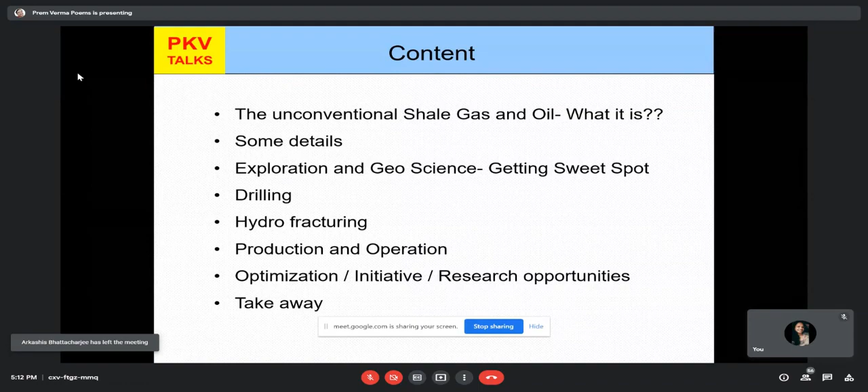Content is, as I told you, what is unconventional shale gas oil. I'll have some details and then some slides on exploration and geosciences, and basically how to get the sweet spot. Then about drilling and hydrofracturing, production operations, and some issues on optimization, initiatives, research opportunities, and what is my takeaway from today's talk.

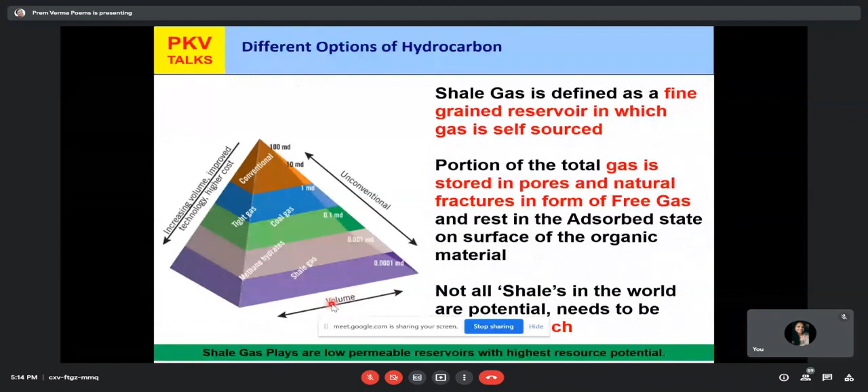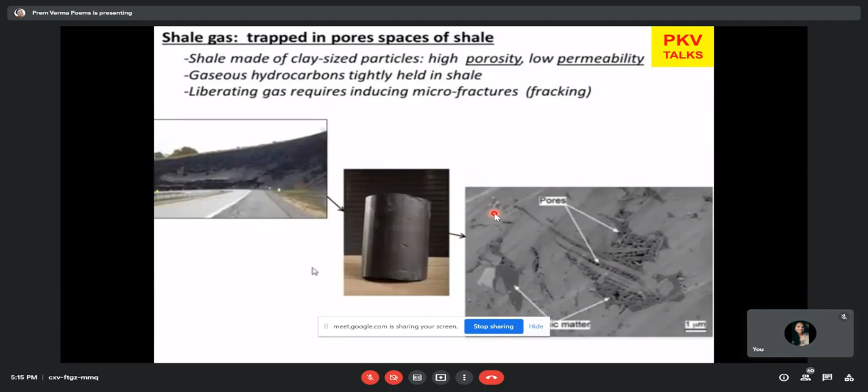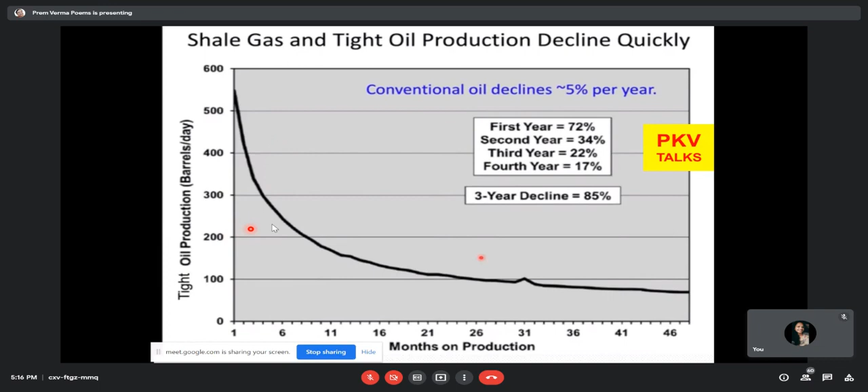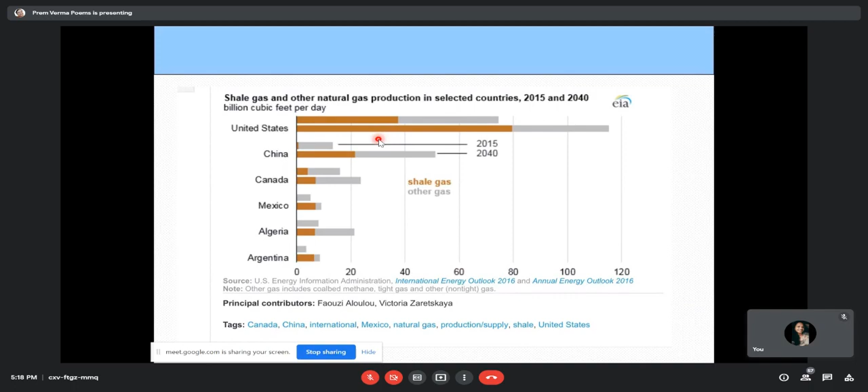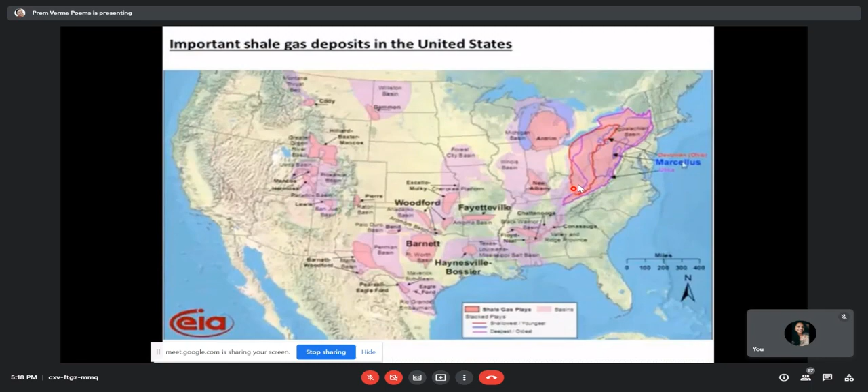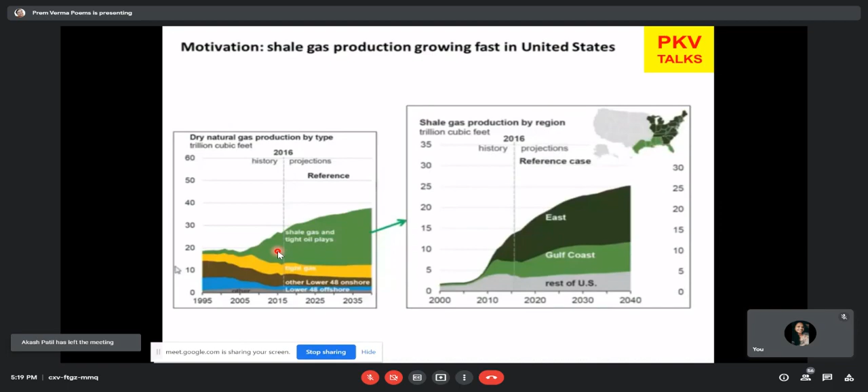Across US it is there, but the maximum shale gas area is in the east. We are somewhere around 30 TCF production, and out of that 50% is shale gas, shown in green color. When you go towards the east, it produces about 10 TCF, and the balance is from others. So the story is that shale can produce a lot of gas, and it is being done in USA and some other countries, and now let's look at where we are.

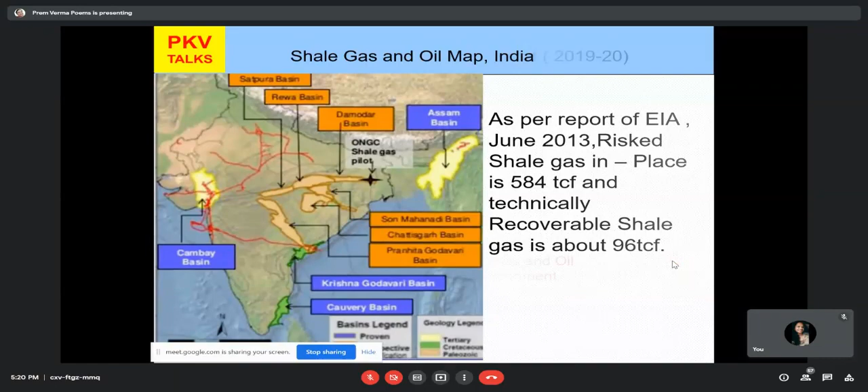But we have to do a lot of work, and unfortunately we are very slow in this, because the policy was announced in 2013. ONGC was given 50 blocks, Oil India Limited 6 blocks. Oil India Limited, till 2019-20, has only 4 shale wells in 2 basins, and ONGC till 2019-20 has only 29 wells in 4 basins. We are still in a very nascent stage. While in USA, in 1 year, they drill something like 25,000 wells, and here we are not even at 100. So we are in a very nascent stage, and something has got to be done.

The reason, as I understand, is these are low producers, and a lot of infrastructure has got to be created, which we are lacking - I'll come to that in my other slides. There are also issues on the policy framework for facilitating shale gas and oil, because this is a costly endeavor and government has to come in a big way. We also have to establish a favorable regulatory and fiscal environment.

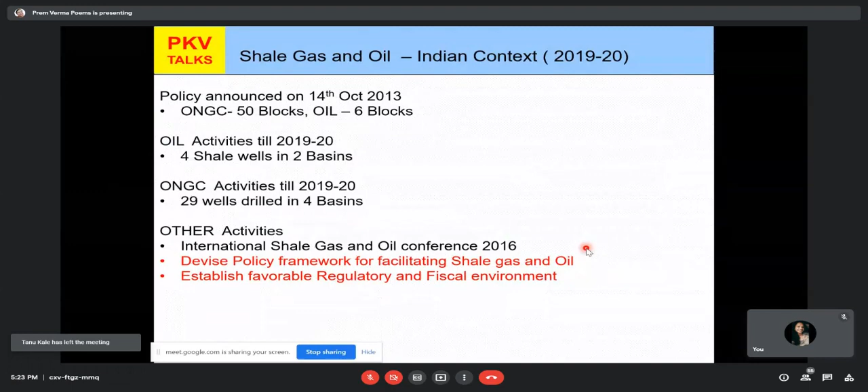Some of the issues include land acquisition, availability of water, even roads. These are some of the issues where government has to come out in a big way to make this happen. We have faced a similar thing in CBM also - they are low gas producers, and companies have to face a lot of issues in starting. Getting the sweet spot in shale gas is a big issue, and a lot of work has got to be done.

In Assam, Digboi was the first oil field in India where we got oil, and they could locate it by seeing the outcrop where the oil was also oozing. A similar condition happened in Ankleshwar, where gas was bubbling through a nearby water pond, and they thought there seemed to be some gas. They did the exploration and got gas.

The story of ONGC begins with the first drilling in Jwalamukhi, in Himachal Pradesh. The area used to be called Jwala Devi, where gas was coming from the subsurface, but in very little quantity. When you pass a lantern or a flame near it, it would just give some flash of gas. The Jwala Devi is still there. We did drilling there, ONGC, but we could not get commercial gas from the area.

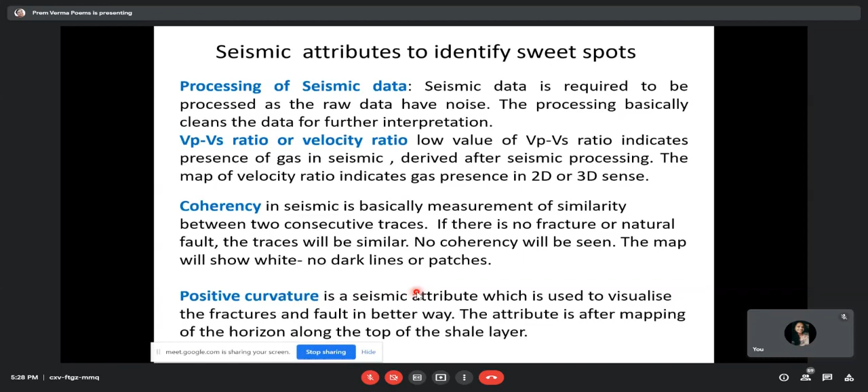Positive curvature is a seismic attribute. It gives us a better picture, better visualization of fractures, and it will help better in targeting the zone for shale gas.

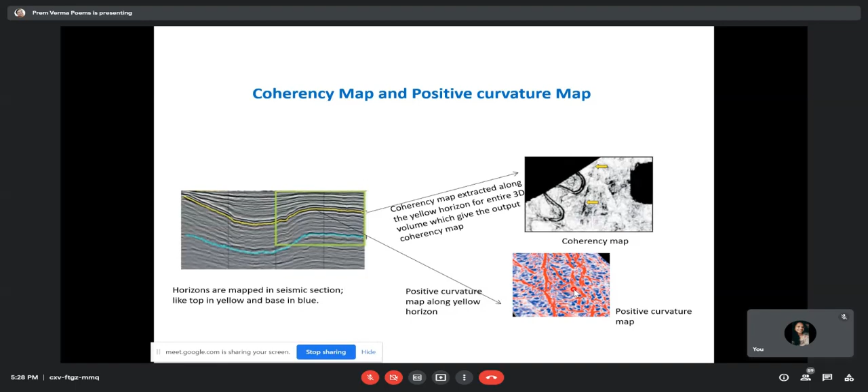You can see here, these are some of the attributes we see on the map, and these are the areas where we can go for shale exploration. This gives a better picture - that is your positive curvature. So just remember, coherency map and positive curvature map help us in getting a better picture for exploration for shale gas and oil.

Lambda rho and mu rho are also characteristics of the rocks. Lambda rho can be derived from sonic and density logs. It measures the incompressibility of the reservoir rock, and its low values show gas presence. Mu rho is the rigidity of the rock, and it differentiates between sand and shale. High mu rho means shale reservoir in this context.

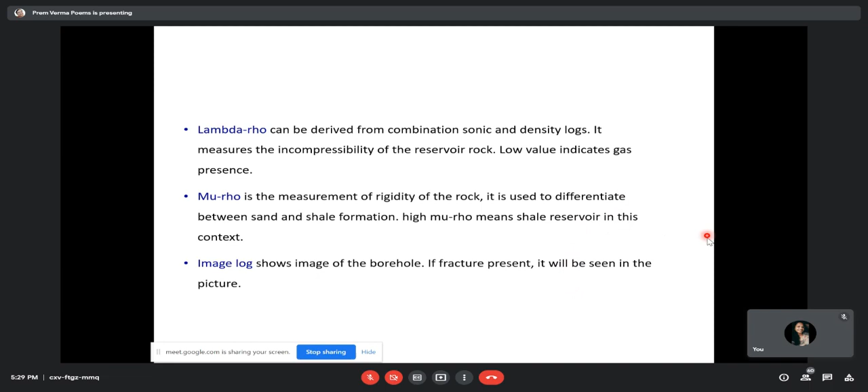An image log shows the image of the wellbore, and these are part of our logging studies. Here again, for the seismic data as I explained, low lambda rho, high mu rho, and low VPVS shows the presence of shale gas.

What we do is use mechanical properties - when we drill and get those rocks, we have Young's modulus and Poisson's ratio, so that we get to know the mineralogical and elastic moduli of the formations. Combined with low lambda rho, high mu rho, and low VPVS, we can estimate the total organic content. That means knowing the thickness and some idea of the porosity, we can calculate the total organic content.

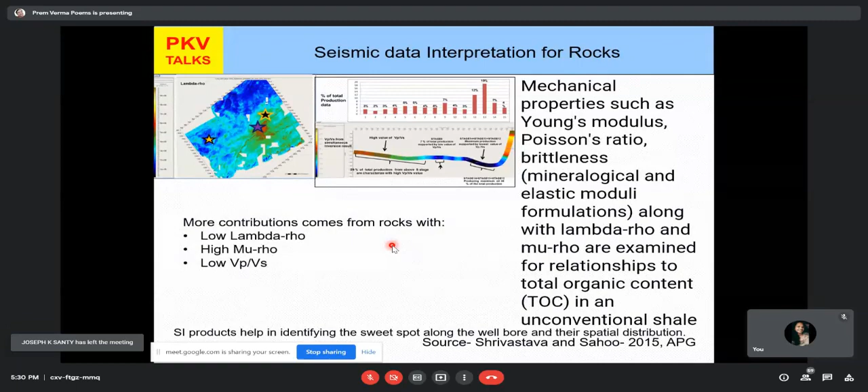Logging gives a very big idea, a very big tool for getting the presence of gas in shale. It can ensure the presence of gas.

Then we do sweet spot identification from the coherency, positive curvature as explained earlier, lambda rho and mu rho, and mud log during drilling with gas shows to confirm the reservoir. Yes, in this section, some gas show is there from the mud log. Density log - low density means gas presence. And we also do microseismic survey, which is acquired to see the fracture propagation after the hydrofracturing.

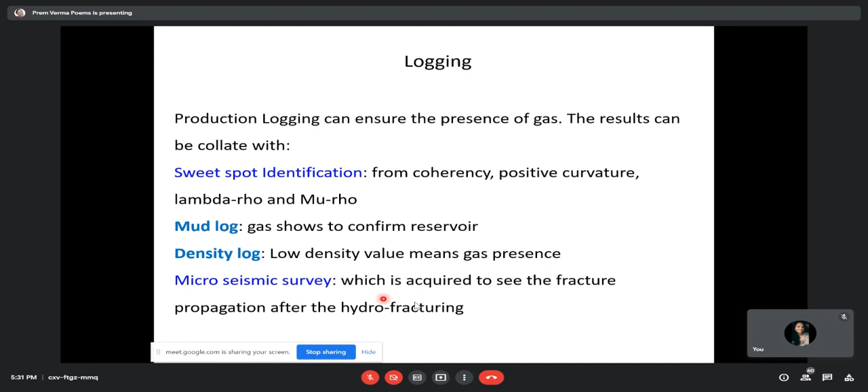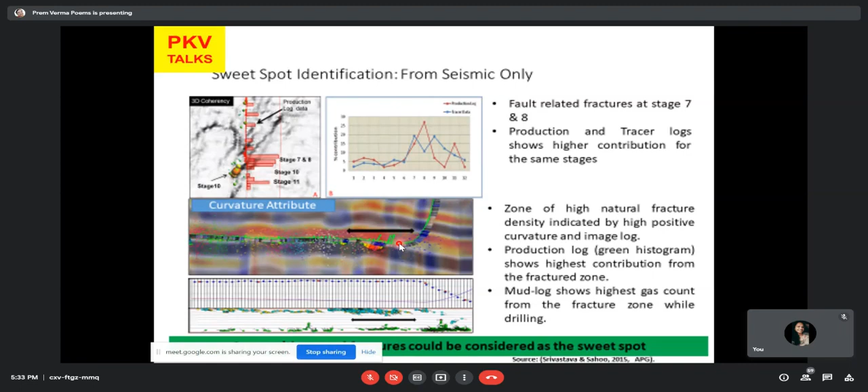And during drilling, the mud log also gives us a sign for the gas. So a combination of seismic, logging, and drilling. When all these are combined, they identify the section where the gas presence is there, and we can produce gas from the shale gas. So I'll come now to drilling.

This just shows the activity in any asset dealing with shale gas, and basically whether it is shale gas or normal conventional oil and gas, activities are more or less the same. However, some of the activities are different for shale gas, that is your well completion, hydrofracturing, then management of fluid, that is in a big way, management of waste, that is also in a big way.

So we start from leasing, we have to first lease the land, acquire the rights, take the permissions, well planning and design, then scheduling, contracting, site preparation, drilling, well completion. Drilling, you can say high tech drilling is there, because we have to go for more horizontal wells, long horizontal sections. Then we have got a specialized technique of hydrofracturing. Then we need a lot of fluid for hydrofracturing. So this is a big requirement here in shale gas. Management of waste, that is also a requirement.

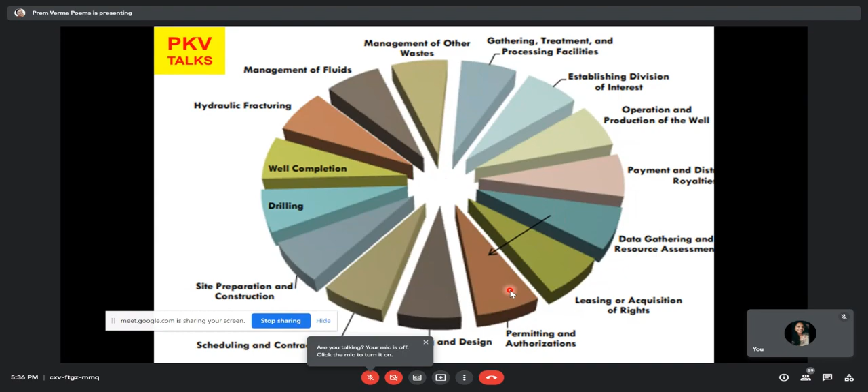Yeah, horizontal drilling has made possible the success of shale gas and oil. It has changed the way oil and gas drilling is done by allowing producers to drill horizontally beneath urban areas. It takes less space on the surface. However, we can cover more areas, and first we have to drill down vertically to a depth of say 5,000 to 7,000 feet, and then horizontally about 5,000 feet. It can vary in different areas, but this is just an idea.

I can say that whatever you drill vertically, similar length you have to drill horizontally, a little less and all that. And special tools to curve the well, that is very important. And as of date, we have got quite specialized tools, MWD, LWD, and all that. I have not dealt with them here, but there are specialized tools to curve the wells from vertical to horizontal, and then enter the gas bearing rock.

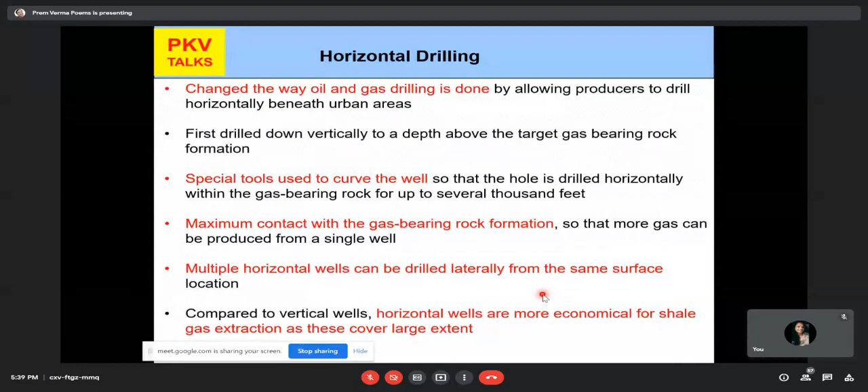This is a typical well. TVD is true vertical depth, 7,000 to 8,000 feet. Lateral, that is horizontal, you can say, 5,000 to 6,000 feet. So measured depth, say this is your measured depth, all through is around 7 plus 5, 12,000 to 14,000 feet from top to the end of the well, the toe of the well.

And there are certain isolation casings, like it starts with 24 inch, then 16 inch, then 11 3/4, 8 5/8, and then your 5.5 inch casing. And here is the completion of the wells, where we have to perforate, then fracture. I'll come to that also. And this length is also quite big.

I have seen in your Pioneer field that 6 to 7 stages they were fracturing in one well from one go. So it's a very highly technical one, and this is technology. Again, it is driving our optimization of cost, optimization of time.

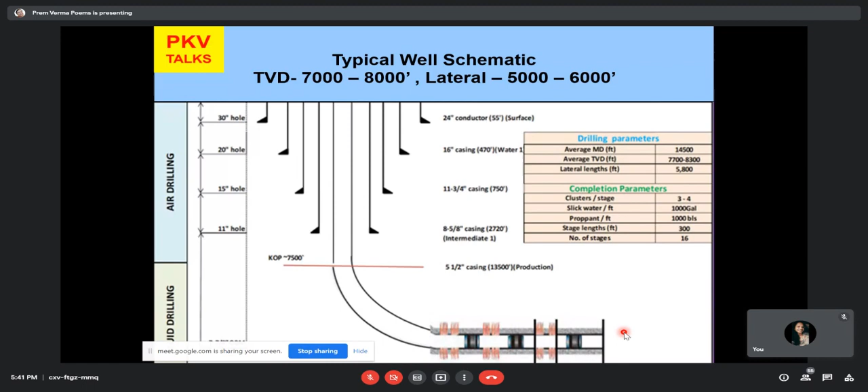As I told you, from one location, this is one location, we call it drilling pad, I can go for 1, 2, 3, 4, 5, 6 wells. 6 wells I can go. And from a smaller footprint on top, we can go for such a big area to produce.

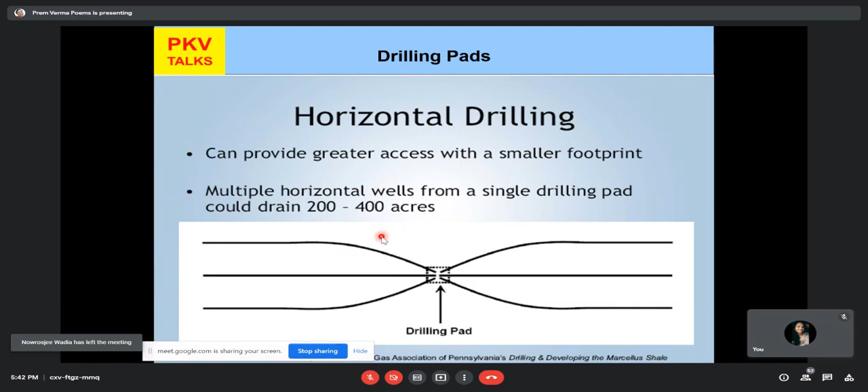And it can drain up to 200 to 400 acres. In some cases, it can be more also. So this is the extent, while from a small footprint on top, I can go for a big area draining. So that is the beauty of horizontal well. And this is only helping our,

say this is a drilling pad. And from here, this is the rig. From here, I can drill 6 wells from this drilling pad only. And this can go right up to here or here or here. All around, it can drain the oil from the subsurface at a depth of say about 7,000 feet, 8,000 feet, and a lateral distance of again 4,000, 5,000 feet.

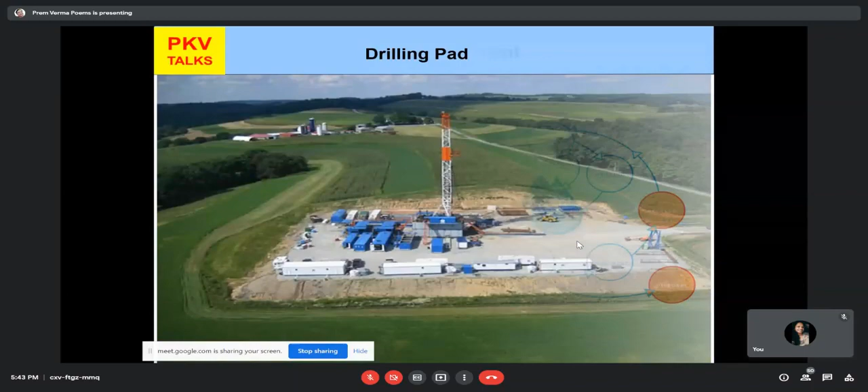So this is good for the environment, very cheap comparatively, because from one location I don't have to take all these equipments to different locations for drilling, rig up the rig, drill it, again shift it. So this has reduced the cost. Again, you can see, I think it's not given here. I'll show you the other slide.

And water management is very important here because for hydrofracturing, we need a lot of water, through truck, through pipeline. And I was talking to one of my friends in the US: suppose I have to lay say 6 kilometers of surface flexible pipeline, how much time will it take? He said, sir, it doesn't take more than 18 hours. I asked how it is possible that you are laying 6 kilometers of water pipe.

Then he explained to me, sir, we have got the reels and 2-3 trucks with reels will come. They will start laying on the side of the road, and this 6 kilometer pipeline he saw once, it was ready in one day. When we talk here in India, the first reaction will be it is not possible. And if it is not possible to do the jobs fast, then shale gas is not possible. So this is one thing we must remember, that infrastructure must take care and they should do the job very, very fast.

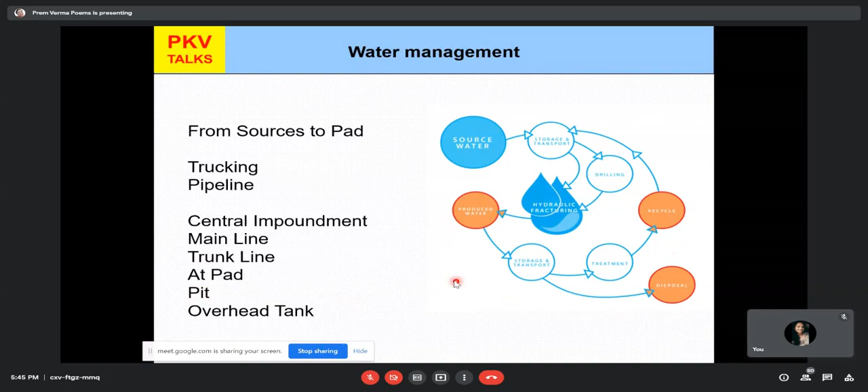So it has got to be taken to the location, and the effluent water, the produced water, has got to be again taken to disposal or taken to recycle. So this is a big job. You have to take it to a central impoundment, then main line, then trunk line, then a pad, that is your drilling point, then a pit for the effluent, and then overhead tank. And when it comes to hydrofracturing, this is still very, very big.

This is a challenge for us, our companies, why they cannot do some of the jobs in weeks. I have been in ONGC, I have been in Reliance, so I know the problems, the local issues, the goons, the political structure. Everybody tries to take something from you, not in a right way, in a wrong way. So the land acquisition is a big problem. Whatever you say, the problems only the oil industry people know.

And I'm just trying to share this with you so that if you get a chance, try to improve. And if we can't improve, then it's a very tough time. It's not only shale gas. Wherever we are, we have to improve. And we should get the job done in weeks, not in years.

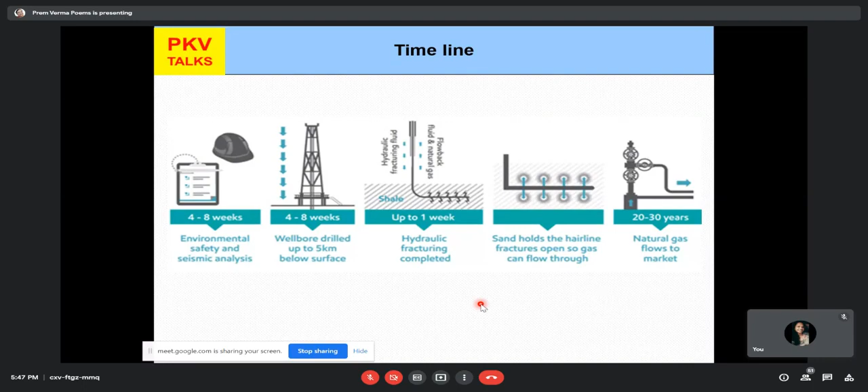Hydrofracturing is a major activity for shale gas. This is a very simple diagram. This is the well, horizontal section, say around 5,000 feet horizontal section or 3,000 feet horizontal section, and we have to fracture all the 3,000 feet. So we perforate first, then we go for fracturing of the zone.

Then a high pressure mixture of water, chemicals, and sand is used to blast and hold that fracture. First you fracture it, then hold it. You don't allow it to collapse. And then slowly you start producing. So first you perforate, then fracture, and then you allow it to seal so that the sand, whatever has been blasted into the formation, remains there. They make the rock open for gas to flow in.

And this is hydrofracturing. It's a very sophisticated one, a big job, and essential for producing shale gas or oil. And on the surface, this is a fracturing unit that fractures. Then we have got the water pond. Then we prepare it, and then we store it. So the whole fracturing process is a bit cumbersome, but we have the ways and means. The world is already

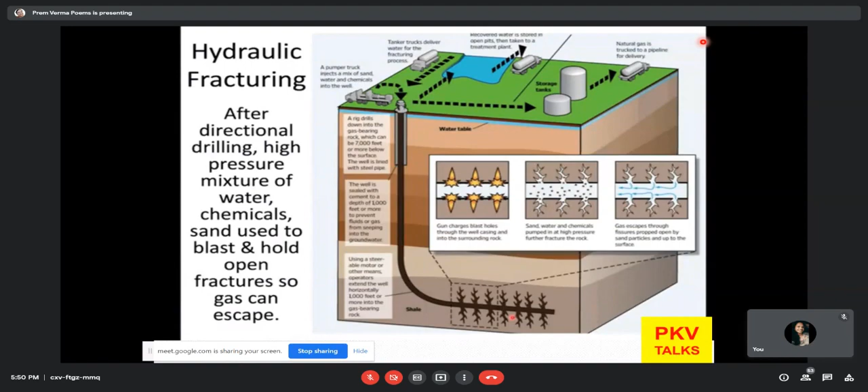So as I told you, create fractures so that the fractures extend from the borehole to the rock formation. Then hydrofracturing: pumping a fracturing fluid into the wellbore at a rate sufficient to increase the pressure down the borehole, fracturing the surrounding rock formation, and keeping this fracture open after injection. That means proppant or solid is added. And this method is called fracking or hydrofracking.

And proppant is commonly a sieved round sand pumped into the fracture. Many times we use ceramics just to have the rigidity or the stability. They are harder than the sand, so it doesn't collapse. The proppant flows within the hydraulically created fractures and restricts those from closure, creating higher permeability. The basic idea of fracturing is to create higher permeability so that the gas from the shale can come into the wellbore and then produce to the surface. Thus, the propped hydrofracture can then become a conduit through which the fluid can produce back to the well.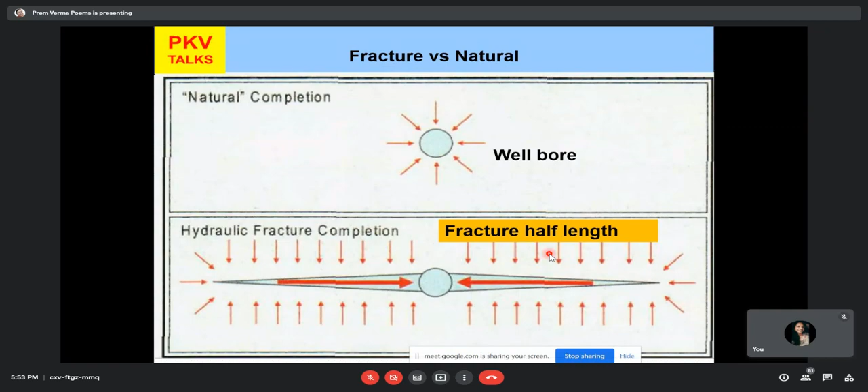So in many cases, in one go, they lower the whole string with all the stages, and one by one they fracture it. Those completion strings are there, and that is possible, and I have seen it being done in Pioneer field when I visited them.

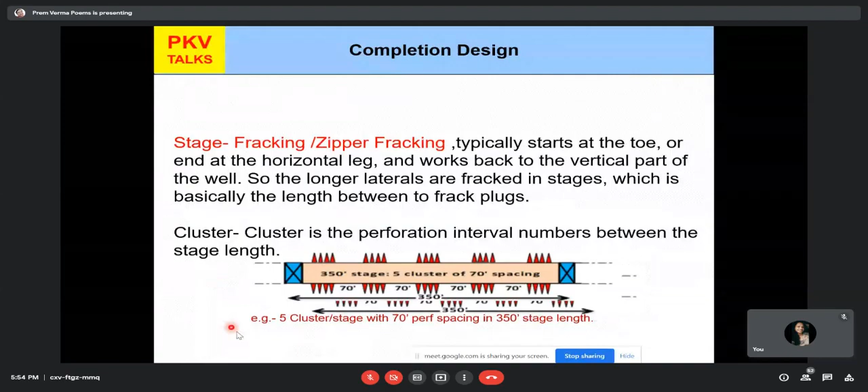Proppant of 100 mesh size is typically used in the early portion of the job for enhanced distance and height diversion and as a propping agent. 100 mesh sand: the higher the mesh number, the finer. And when you put 40/70 or 40/80 mesh, they are a bigger size. So initially we put the 100 mesh and then we increase the size of the particle, or reduce the mesh size, so that the fracture conductivity enhances. And we use some resin coated tail-ins where sand flowback is an issue. So near the wellbore, we put resin coated tail-ins or sand. And in many cases we are using ceramic proppants also.

And another thing is that if there is increased proppant and less fluid, we try to have it so that the flow back is less and environmental issues are reduced. So this is what we do with the proppant.

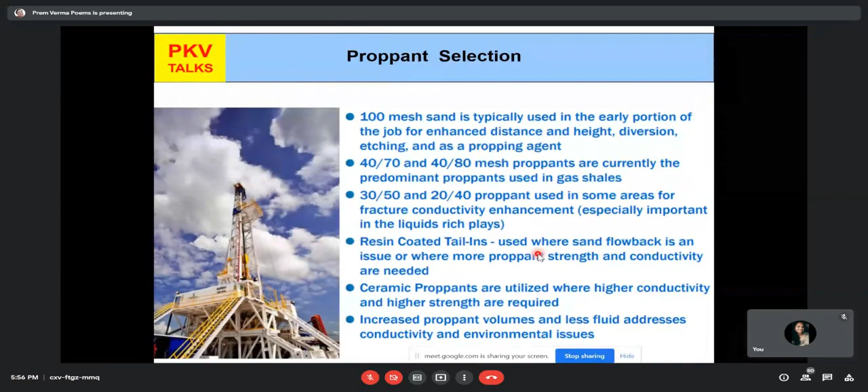Then the whole frac is designed for the maximum principal stress direction, in which direction the fracture should propagate, and basically it should be horizontally, not vertically. If it goes vertically, then it can create a problem. It won't go into the shale section. It may go into other sections, where its basic purpose of increasing the permeability in the shale section is defeated.

Then what is the lithology? Then stress types, then natural fractures. A lot of parameters are there. And the good thing is that companies have worked on it and they have got some very good software where they design the frac program for the particular well. And what we have seen is that they also make a lot of changes based on the results they get from the field, and then they modify their programs based on the knowledge, the software and the field feedback.

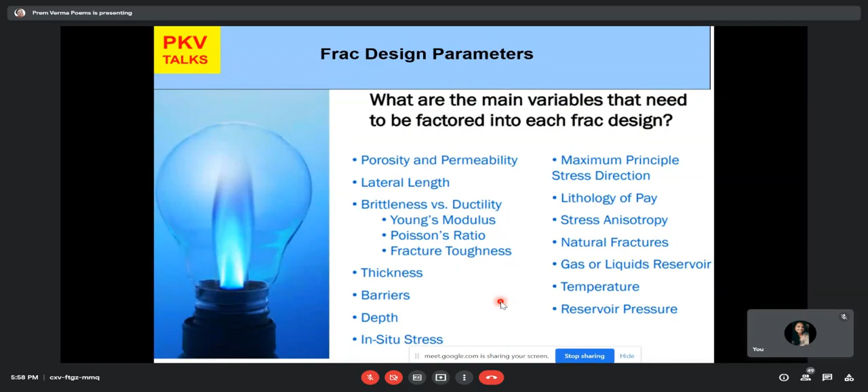And this is the model: the deviation of the well and a pump schedule are entered into the fracture model, with numerous iterations with different pump schedules, perforation schemes, and other variables, and then they optimize the design. And what is the optimum design? One that covers the height of the pay interval, doesn't go vertically into other thief zones, creates a sufficiently conductive propped fracture length, minimizes well interference, and provides the best production result based on the reservoir flow simulation.

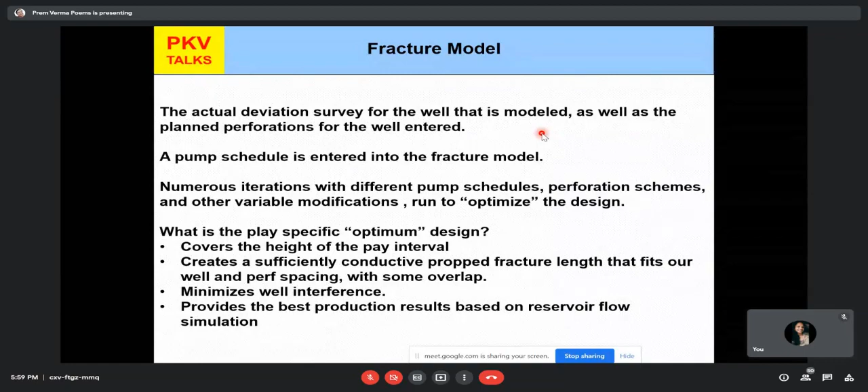First, we simulate what the expected production from this well shall be. Then we prepare the fracture model. Then we fracture the well. We see the result from the well. And accordingly, we do some iteration process and modify it or change it.

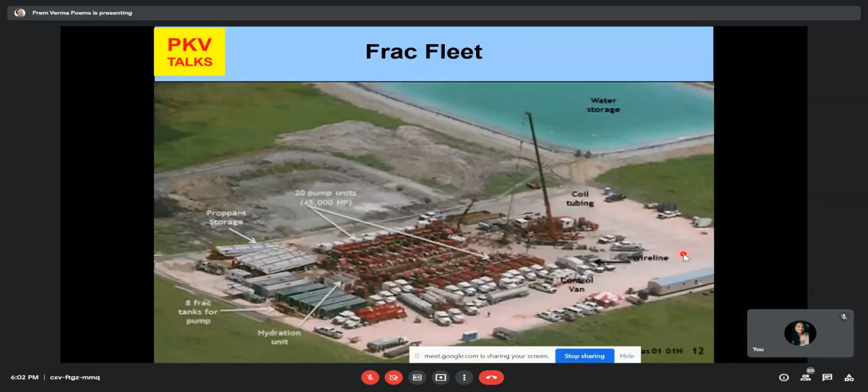In our country, we have done a lot of frac jobs, but certainly there are very few cases of this type of very, very big job. In CBM, we have done some frac jobs, and rather all the wells in CBM have been fracked, but the job is of a smaller magnitude. Here in shale gas, it has got to be a big job.

Fracturing fluid is also very, very important, because fracturing fluids carry the proppant and keep it in suspension, and this also has to be designed based on the frac job design. Fluid system factors are very important, like viscosity, rheology, economics, and experience with the local formations, which combinations work well in a local area. Then we do a lot of lab studies, see what material is available, and then proper selection, proppant selection.

So fluid systems carry the proppant and help in pumping the proppant into the formation. They may be linear gels, cross-linked gels, foam, or friction-reduced water. So it's a combination of various chemicals.

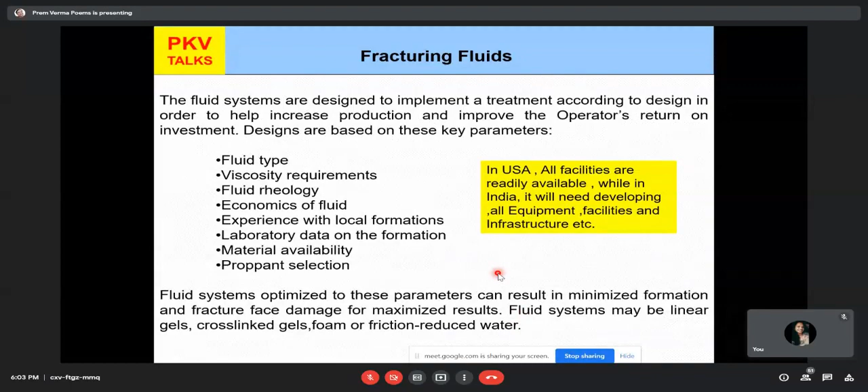As I told you, water resources also: for a typical fracking job, that's again a case of the US, a typical fracking job uses something like 3 million gallons of fracking fluid and some 15,000 gallons of chemical waste or flowback fluid. After the job, we flow it back, and that fluid we have to dispose of. So that's also a big job.

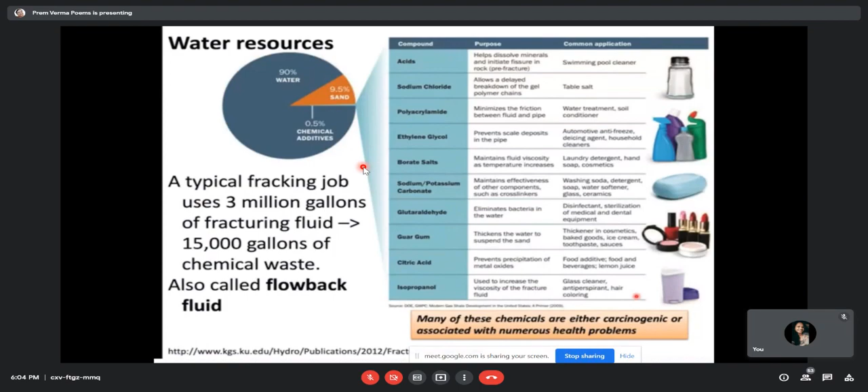And these are various chemicals given here that are required. Based on our frac design, the chemicals available, and as per the lab results, we select them, and then we make it ready for the frac job. Production and operation.

So from this, what we can get is that for drilling, it's sophisticated drilling of horizontal wells, a big horizontal section, quite large, quite long, and then we have to do fracturing. And these two, drilling and fracturing, involve a lot of software jobs and a lot of field jobs. It's a costly operation. So our objective should be to reduce and optimize the cost.

How can you optimize the cost? By making the operation take less time, less money, less effort, by combining the jobs, by proper good design. And now I'll come to production and operation.

I had a visit to Pioneer Field in the US in 2013. We arrived in Houston, at San Antonio, and from there we went to the field, that is the Pawnee Field Office, Eagle Ford Field, as I showed you in the map, down south. Then the Pawnee Field Office, and then we had the tour of wells that you can see here. These are the tour of the wells.

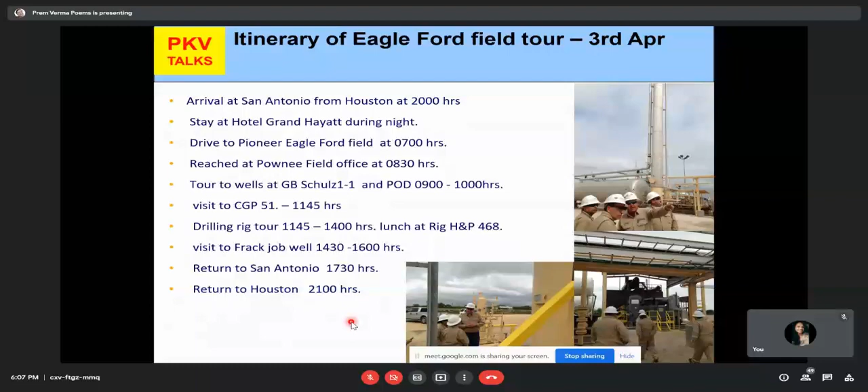And one of the biggest learnings I can say is how to optimize, how to reduce cost, because success of shale gas production will only depend on that. Operations are managed from this office only.

Okay. First, we had the safety brief. As I told you, safety is very, very important. And all the companies have a safety brief for anybody coming to that field. You must wear a helmet, a must, safety hard shoes, dungarees, and that is your dress throughout your life in any oil and gas field.

Those who are in office, in some companies, in office also they don't allow normal dresses. Company dress is a must. But for the field, this type of dress is there: dungaree, hard hat, goggles, gloves, shoes. It has its own complexities, sophisticated drilling and completion techniques, complex high-tech frac jobs. Whatever I told you, I saw it.

And a well-organized base office with good amenities, conference hall, office rooms, workshop, recreation area, gym, etc. These are some of the basics we do have in most of the companies.

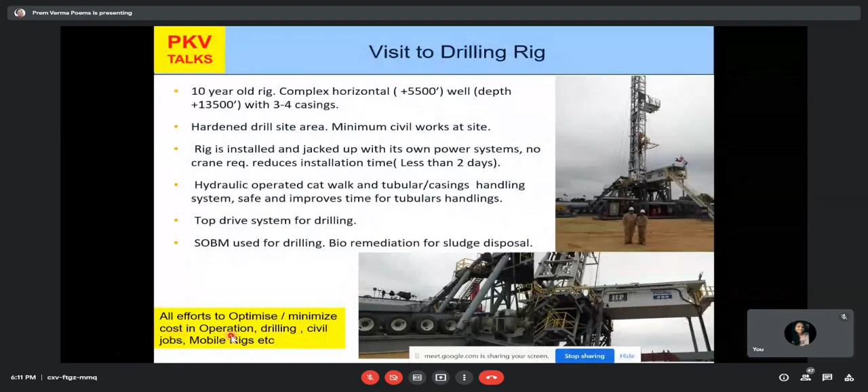All efforts are there to optimize or minimize the cost in operation, drilling, civil jobs, mobile rigs, etc. These are some of the figures: there were 10 rigs, almost 300 wells they had drilled, and 280 wells they had fractured.

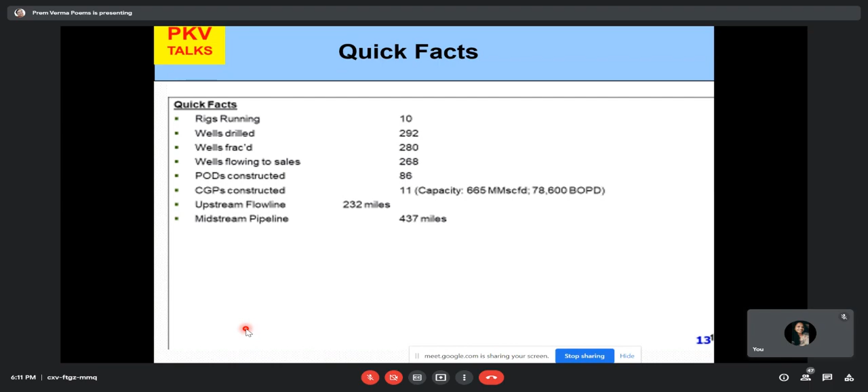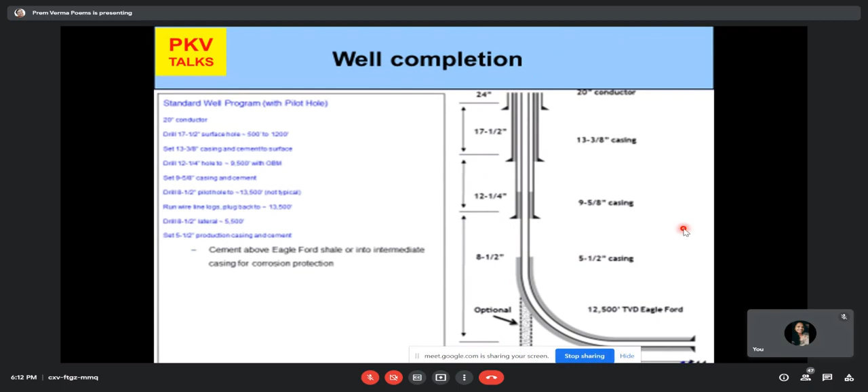As I showed you in that earlier slide, there are a large number of frac units, and all the systems including the control van where we control all the operations for fracturing. It's a big system, not less than 50 to 60 vehicles, and the vans and the tanks are covered at one location where we go for this fracking.

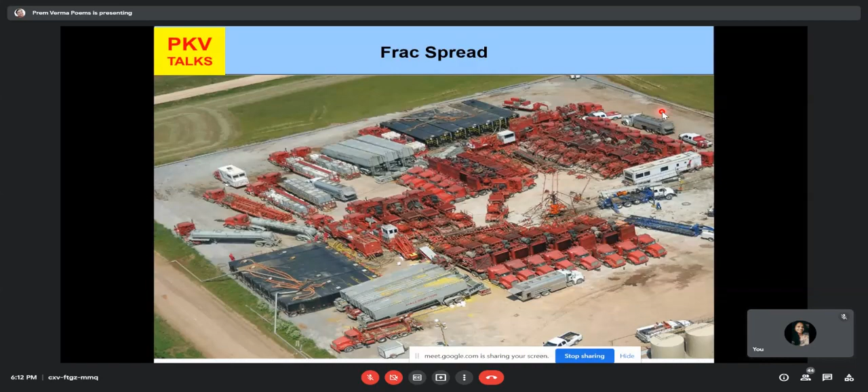Zipper fracking, as I told you, in one go I can frack 7 such clusters, and these fracking units are attached to this manifold. You can see here 1, 2, 3, 4 wells.

And here we are going for this coil tubing unit for doing some jobs, packer jobs. So from this location, and you can also see 1 or 2 behind, so total it becomes 6 wells. At one location, 6 wells, and this hydrofrac job is done in more than one well also in one go.

So it's very sophisticated, and I could see the discipline, the seriousness, the competence of the team there, who were doing all this job very meticulously and in a very organized manner.

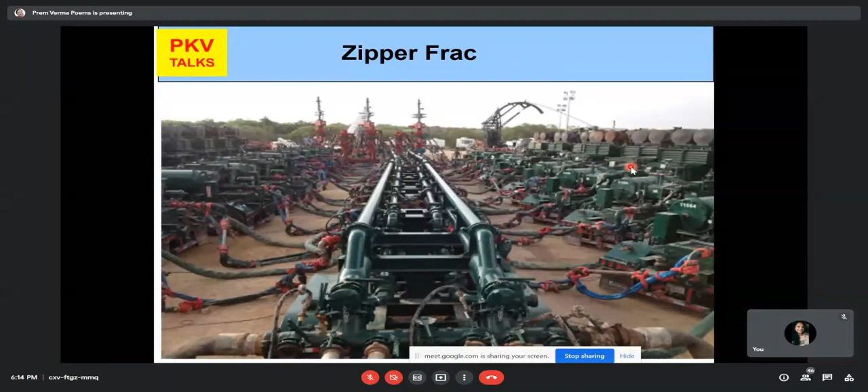High volume, high pressure, multi-stage, complex frac job. They have the zipper method, which involves multi-stage frac job with isolation through wireline, integration of CTU as per plan. At one location, 2 or 3 wells are fracked simultaneously, so the whole system has got to be ready, prepared properly.

Automation, monitoring, and control of all parameters are done through the control van located on the site. I saw that van also, how they're monitoring all the activities there.

One thing I just wanted to share with you: when the teams do these jobs, before any important job, they do a toolbox talk. That is very, very important. All the team members gather at one location, and the supervisor explains to them what jobs they are going to do, how they are going to do the job, and what their responsibility is.

If you have got any doubt, anybody should share at that moment only. That way the whole team is ready for their next job, and they are totally synced. There is no divergence of views. They know their job, they know their responsibility. That's why the toolbox talk is also very, very important.

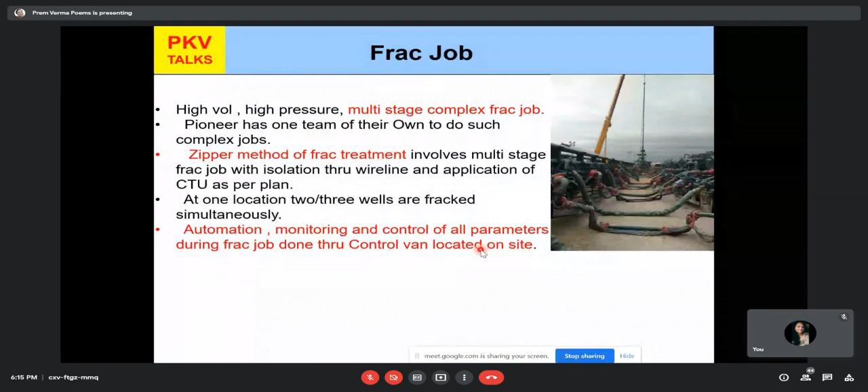And wherever you are, it's not only fracturing. At any rig, any platform, anywhere, for any important job, there is a toolbox talk. And this is just like in India also, we have got the GGSS, then we go to the central platform, and then we process it, and then we pump it.

This is called a pod. This is the wells, they are connected to a pod, and point of delivery - here the very interesting thing is that these well owners are the public, where the wells are drilled or from where we are producing. Not like in our country where the well owner is a company or the government, and the government has to be given the royalty. There, the royalty is to be given to each owner, and that's a very, very tough job. You can imagine hundreds of thousands of owners are there, and if there's some discrepancy in measurement at the pod, the guy comes and starts a hue and cry about why his production has gone down, and you have to explain.

For each owner, each well, there has got to be a measurement system. So it's a very, very big job. They explained to me that it's a nightmare, and they are always very wary of these owners.

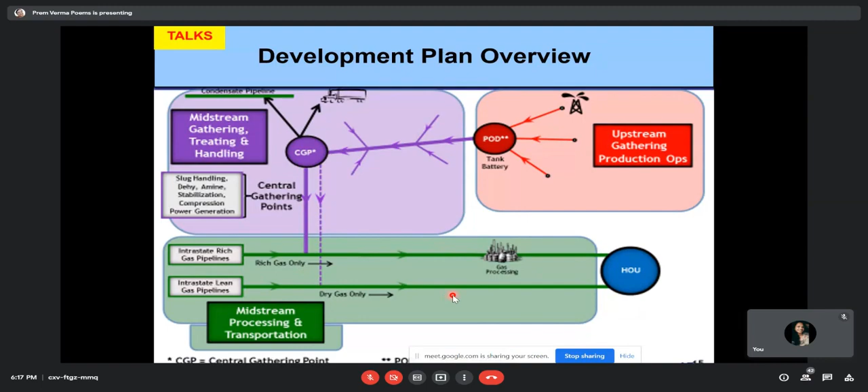And then this gas is collected at the central gathering point where we process it, and then it goes to the pipelines.

I'm at a well. Mineral owner or land owner requires separate lines to the pod. They say, no, I should have my own separate measuring arrangement - for each owner, there has to be a separate measuring system.

And no regular manning, only once in a day - people don't get stationed there. You can see here it's a minimum band, not such a fencing or boundary that we see in any oil installation in India, only barbed fencing, nothing much. Bare minimum facility, skids on small cylindrical piles, only skids.

Minimum of civil work, cellar pit at ground level so the rig can directly approach. No permanent pig barrel - they keep a portable pig barrel. And a simple chemical injection portable skid, just like a drum.

They connect it - there is a solar panel which runs a small pump here. The chemical is pumped, and the empty barrel is again taken by a truck, and they bring a chemical-filled tank which is simply connected. Very simple systems.

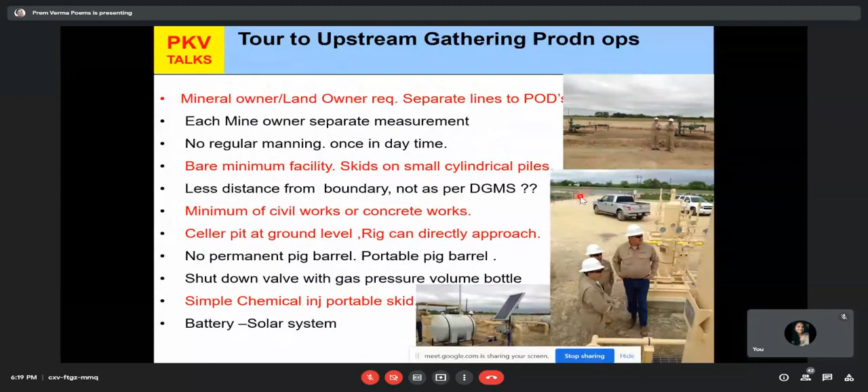And it's all solar and batteries - no power, no electricity, no manpower. Only one person or one team comes in a day, and they just check the things and report to the base.

Each mineral owner has separate metering - orifice meter for gas and Coriolis meters for liquid. Once metered, it's transported to the CGP in two lines, oil and gas; produced water is separated and transported - these are the produced water tanks. Fit for purpose facility only, very minimum facility, very minimum facility.

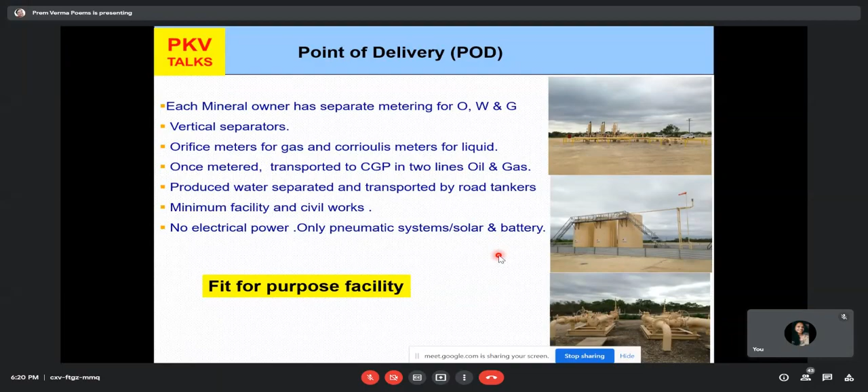You can see here the total area is only hardened, not too much of a civil job. Even the fencing is only barbed wire fencing. This is a central gathering point with bare minimum facility, not even a big control room, just some panels. It's a non-populated area with less population. The control room is basically a field panel room, and all equipment is modular with skids. We also produce H2S there, but operators have monitors only on body, there is no centralized system for H2S monitoring. Total area is only hardened, minimum civil job, fit for purpose facility.

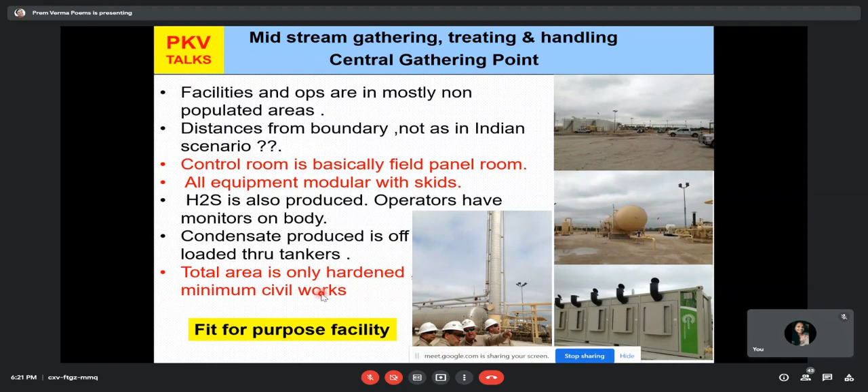There was some thought to invite their engineers to our CBM project of the Reliance project to share knowledge and experience in frac jobs, and send our project and operations team for a field visit to see for themselves this optimization process in facilities and cost. That's very important. We should not go for very costly installations, because then it will defeat the purpose of an optimized or cost-effective shale gas project.

And the Director General of Mine Safety should also visit this facility and really not impose huge regulatory requirements of 90 meters of flare, 6 feet of fencing, and all that. And in designing also, why should we have such an elaborate design? These are my thoughts.

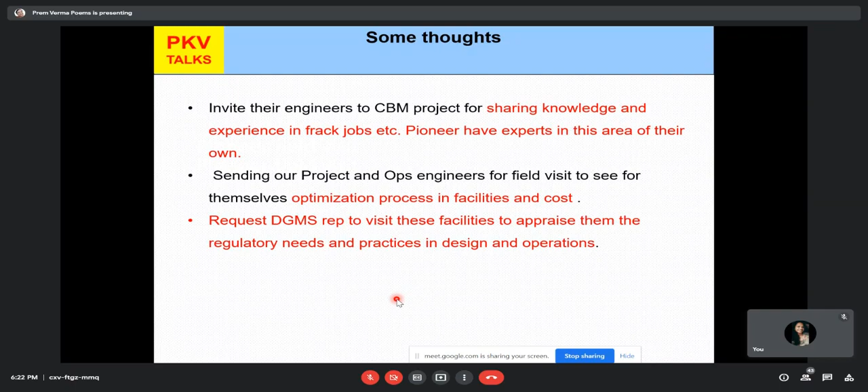I'm just sharing with you also, for these hydrofracturing jobs in shale gas production, these hydrofrac wells can create some fractures that can come to the surface. There are some instances in India also, in the Mehsana field, where heavy oil is produced, and in the water table they started getting gas. So we had to take a lot of action to control it. These are some issues we have to look at so that we don't pollute and don't create environmental hazards. That is our responsibility.

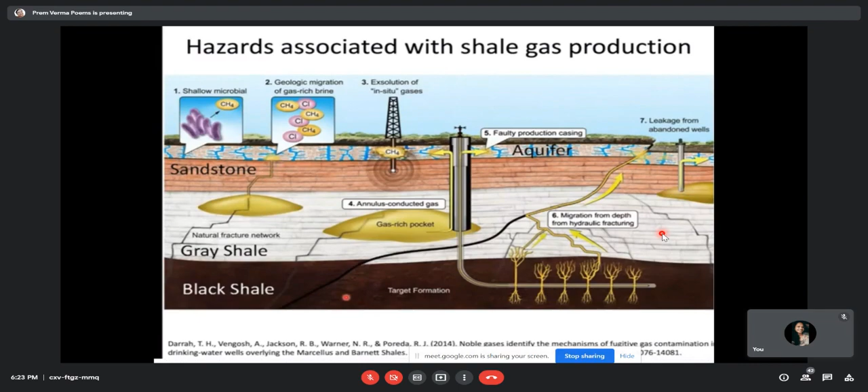And that is applicable anywhere, wherever you are, in subsurface, service companies, drilling, or production. These days, when we have millions or trillions of data points, if you don't use them they go to waste, but if you use them they are a real mine of knowledge, and that is wisdom. I just recollect one example I'm sharing with you: one well got its subsurface safety valve closed.

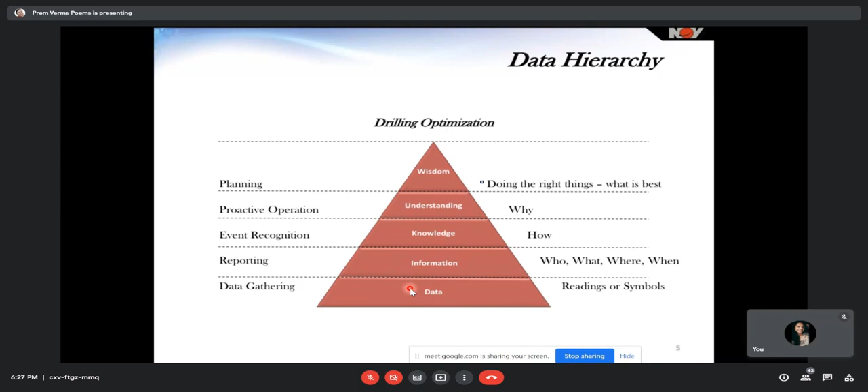So these are the things this triangle speaks of: data, information, knowledge, understanding, and wisdom. Wisdom is used for planning. Why is used for proactive action, event recognition. As I told you, when the subsurface safety valve closed, data reported that it got closed. When it got closed, we checked how it got closed, why it got closed, and did the planning, and again checked the data. There are so many instances where we get the data and use it for the benefit of the operation.

Same way these days, there is data collection from the rig to the real-time technology center, then monitoring, and then the feedback. And data analytics is playing a big role.

These days, application of drones and optimization of services are being done in a big way, and many of you will certainly be involved in such jobs in the future.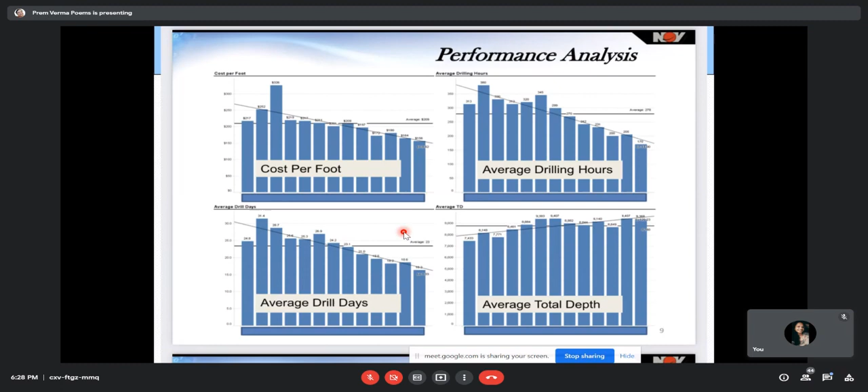Suppose I drilled a well in 15 days earlier. Now I should plan how I can drill in 13 days, or 12 days, or 10 days. With the help of data analytics, improvement in technology, and our operational knowledge, this is happening across the world.

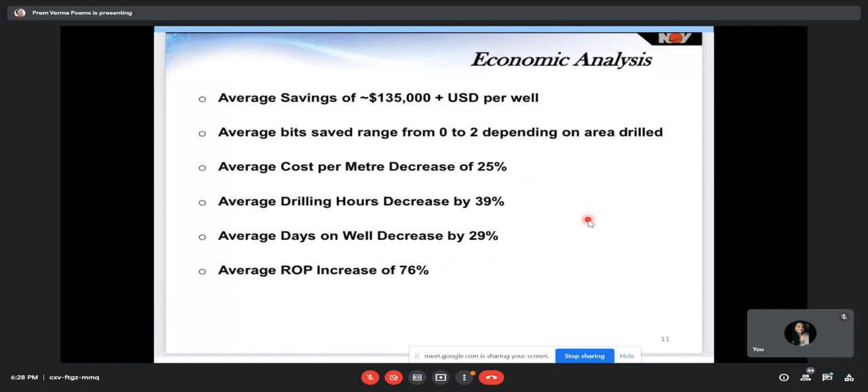You can see here, average well saving is $135,000 per well - that's what they saved in their study. Average bits saved, number of bits they saved too. Drilling cost, say 25%... so many improvements have been observed by meticulously planning and doing the job.

I just wanted to share something about the Indian context. I have only 2 slides more - finding sweet spots.

The job is how to prepare a best-in-industry workflow and suit our context. That is the job of the subsurface teams.

One idea is that, to start with, can we try to get shale oil or gas zones in the existing producing fields, so that we can use the available facilities - your GGS or wells, because lines are connected. So a lot of expenditure we can save, and we can have some pilot projects.

This can be done only by Oil India, ONGC, where we have old fields and we know the areas where we are producing, whether it is KG Basin or Cambay Basin or Assam. Something can be done.

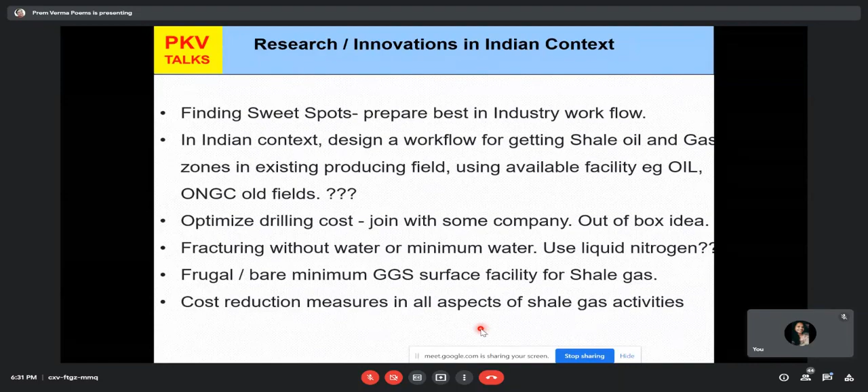So what is the takeaway? It's a complex one - shale gas business is a complex one. USA, Argentina, China, they are leading. India is in a nascent stage.

Subsurface complexities are to be addressed. Large number of wells with low production and less life cycle - this is the reality, but still people are making it cost-efficient and profitable. That's why they are producing TCFs of gas in the USA.

High-tech systems in drilling improve efficiency - for drilling also, yes, it has got to be done. Advances in hydrofracturing - I think service companies are coming up with all new ideas, and improvement is there everywhere.

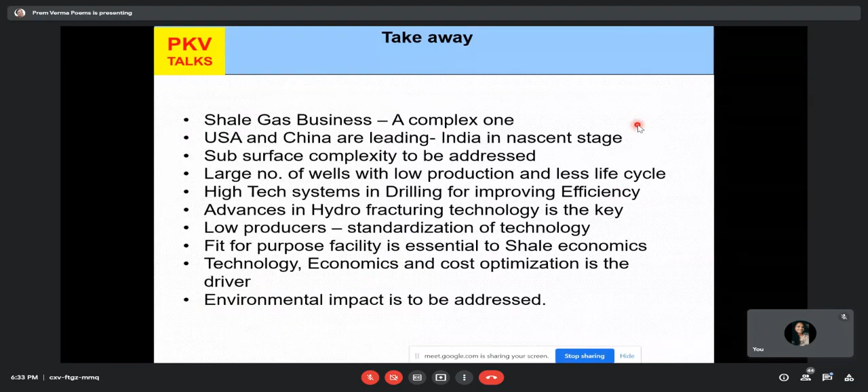Utilization of technology, systems where it reduces the cost, fit-for-purpose facilities. Technology, economics, and cost optimization is the driver, the key for success of shale gas. And environmental impact is to be addressed. So these are some of the takeaways.

I have got details from DGH reports, some SPE, AAPG conference papers, Google, YouTube. It was my RIL, Reliance Industries Limited visit report, some company presentations. My mail ID is pkverma@gmail.com.